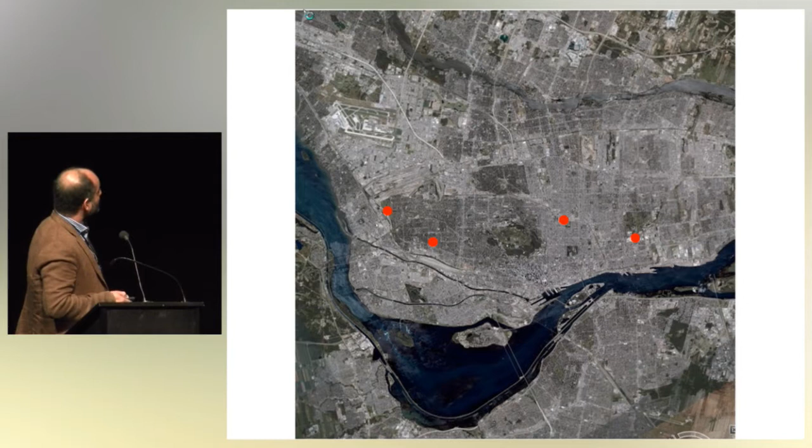Now, I'm not going to talk that much about what we actually won the award for. I'm going to talk about the part that we didn't win any awards for, or shouldn't have. Benny Farm is just to the west of the mountain, in Notre-Dame-de-Grâce, NDG. To orient those of you who haven't seen anything about this, it's World War II veterans housing that by the early 90s had fallen apart and was kind of empty for obvious reasons.

I flashed this slide because it took 11 years for the master planning of this thing to shake itself out. We were involved, but from the community side. By 2003, the plan was kind of fixed, and we were going to save some of those buildings—that was really what most of our concentration was on.

We embarked on our integrated design process for all the remaining buildings and for the Énergie Verte Benny Farm, the Green Energy Benny Farm project. We were imagining a kind of landscape—these are drawings from the early 90s, the early days of thinking about this.

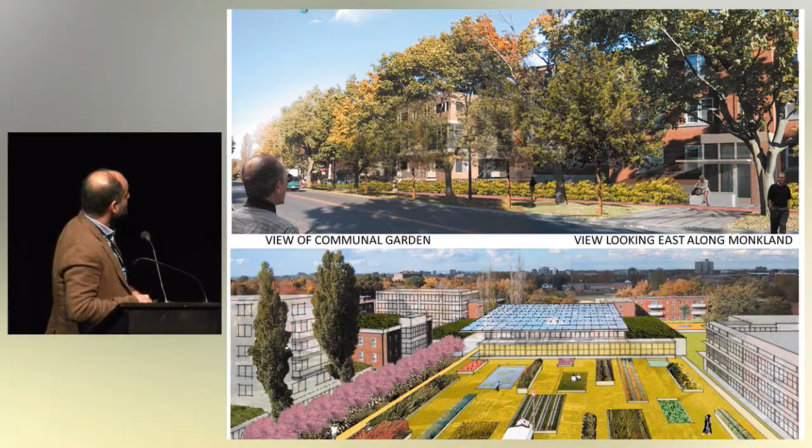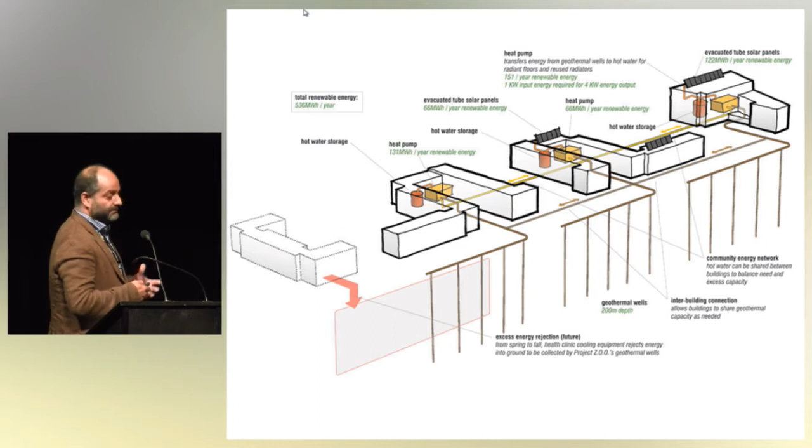The project that we actually won stuff for, and that was really fun to work on and execute, was a very complex but in some way really simple weaving of materials and energy and water infrastructures, et cetera, on the site.

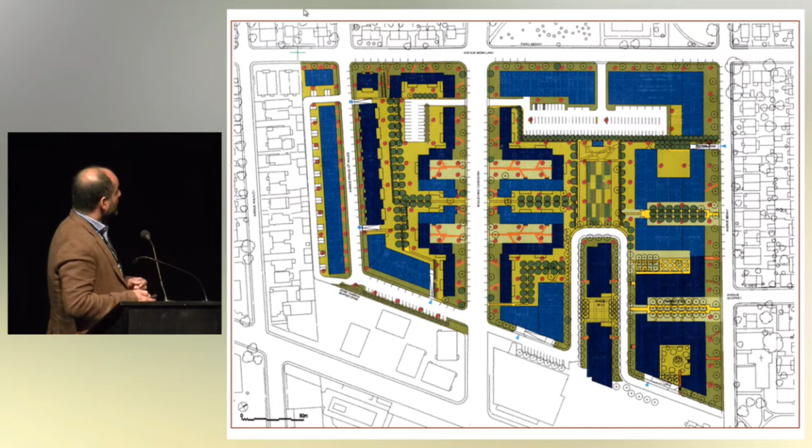Now, all I wanted to tell you about this project is that the site plan, even though we fought for the site plan and the maintaining of these buildings for 11 years, was actually made by Canada Lands Company and their consultants. There was something about it that I want to underline, and then I'm going to leave this project.

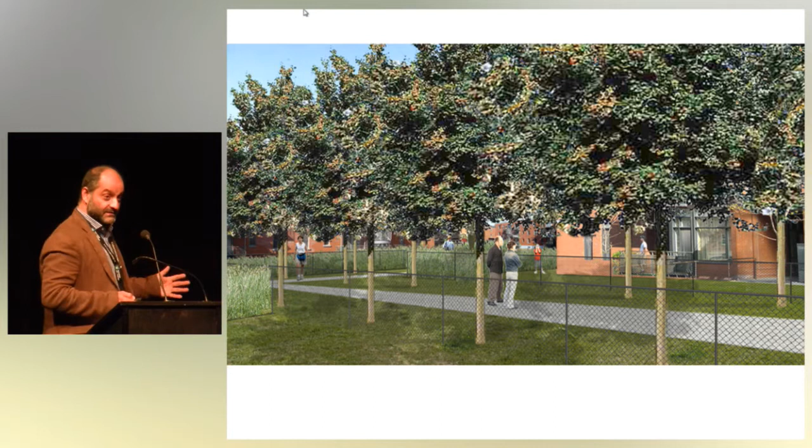This was their image—this was the vision they had for the site. Frost fences and all, mandated in the master plan, with really fixed property lines, and the agreements were all weird. In other words, there wasn't a lot of buy-in for this idea of the commons, except for one thing.

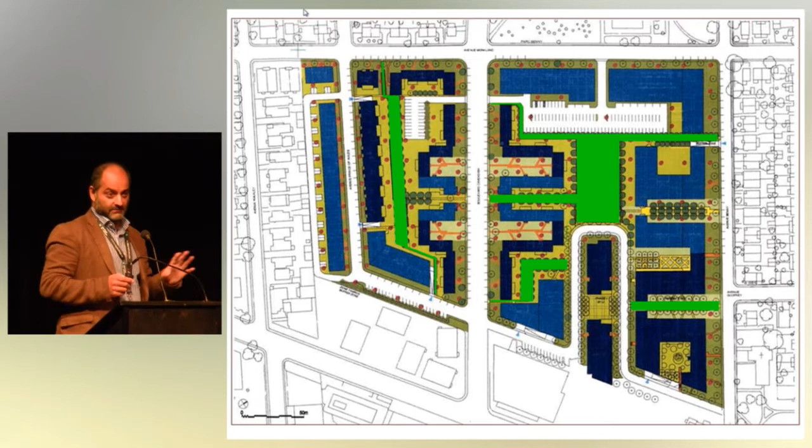So you see in green here—this is a really interesting thing they did, and it has an impact on the rest of my talk—they established this thing called the horizontal condominium, which was actually 10% of the site. Look at the form of it; it's kind of interesting, you can do some things with that.

On Benny Farm, with this 10%, what they decided to do was gardens. Kind of makes sense. So they did something, but it was really difficult because we couldn't do this—and we couldn't, because of the configuration of the horizontal condominium.

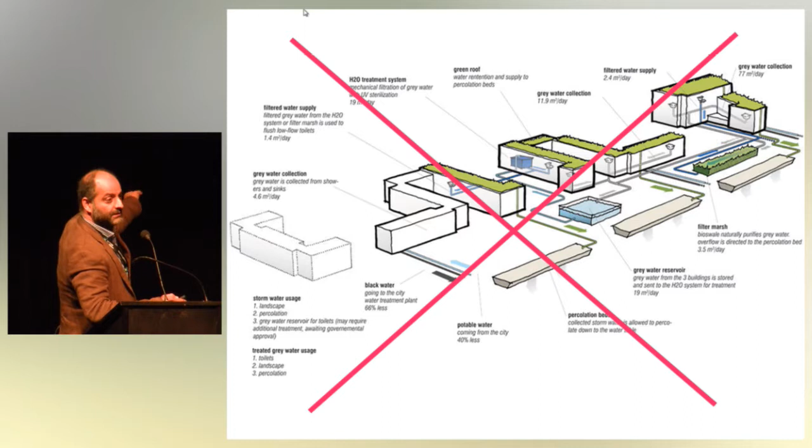More specifically, the problem is that without cooperation from the master plan—specifically where the property lines fall, and I'll add to that the agreements around them—shared living systems water management is very difficult to achieve, we found out. So I'm going to leave that now, and we're going to talk about Rosemont, which is another project.

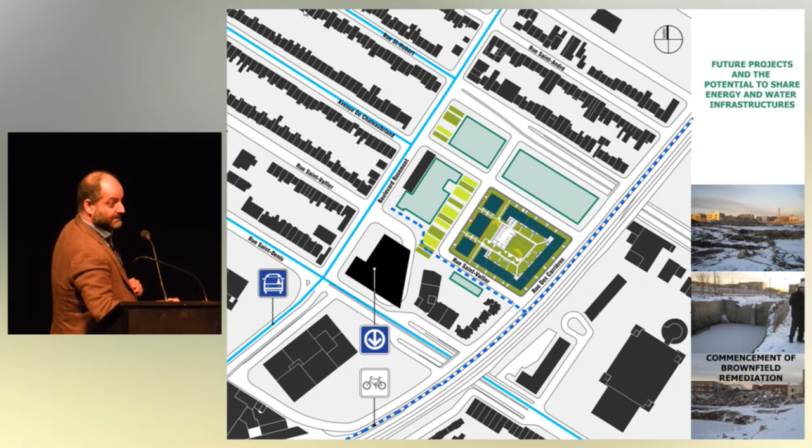It's on the other side of the mountain, in a kind of interesting neighborhood right near a metro. We actually had more control over the site plan this time. It was a smaller project too, but I wanted to show this one quickly because we got to do what we do at LIF, and we tried to integrate things as well as we could.

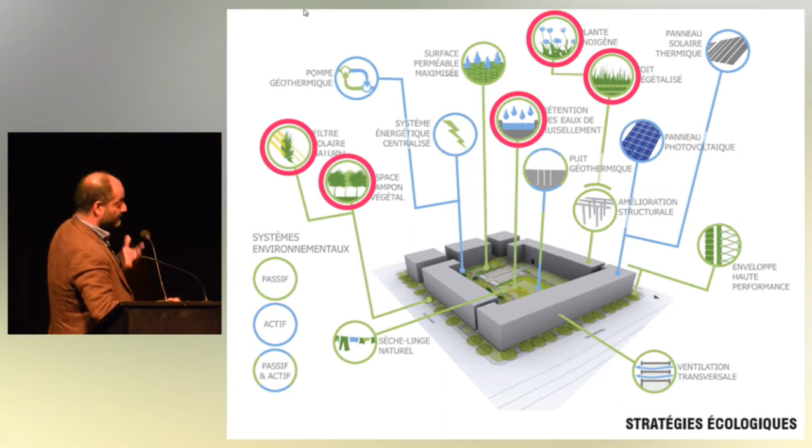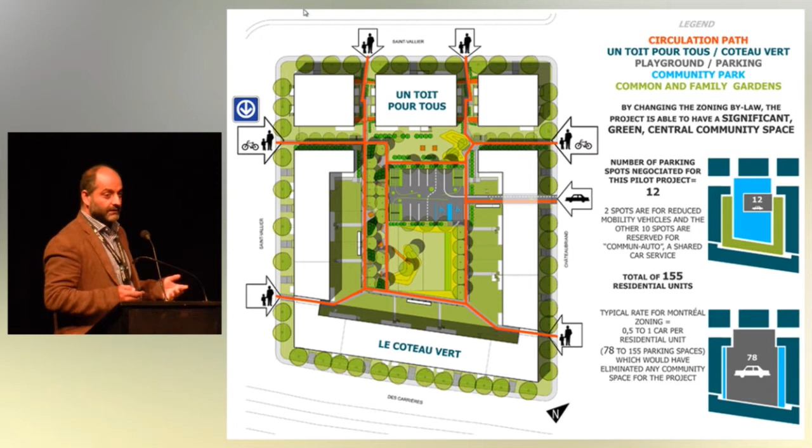In the site plan here, there are 2 different property owners, and we actually managed to get the city to release this crazy parking number they needed, which was 78—we got it down to 12. What we did with that extra space was make this kind of commons that also gathered rainwater, which doesn't come so much, but I'm told, we're all told this morning, that we're going to have plenty of water.

This basin here is meant to catch those extreme events, and there are also percolation beds to put it back into the water table, et cetera.

But what I want you to see here is a very simple lesson we learned: that lots of these infrastructures have multiple uses. It's, of course, where all the kids play, and it became very important for the placemaking side of the project.

It's a very successful project in many ways, but the coolest thing about this project is that people say, God, I love that courtyard. I'm really glad we were part of making that courtyard, and it's infrastructure, right?

So for those two projects, I want to leave this: define your common spaces and master plans with food and water in mind. You must, because they take up room, but they can have more than one purpose. So we learned those lessons.

You've got to think about property lines, you've got to think about servitudes, you've got to think about the agreements undertaken during the master planning side. And when you talk about biodiversity, you have to start also thinking about connectivity.

So here we're going to talk about this project, the Petite Rivière. We actually started in 2007, but these dates are when we were in the thick of it. So that's the kind of image of these dates.

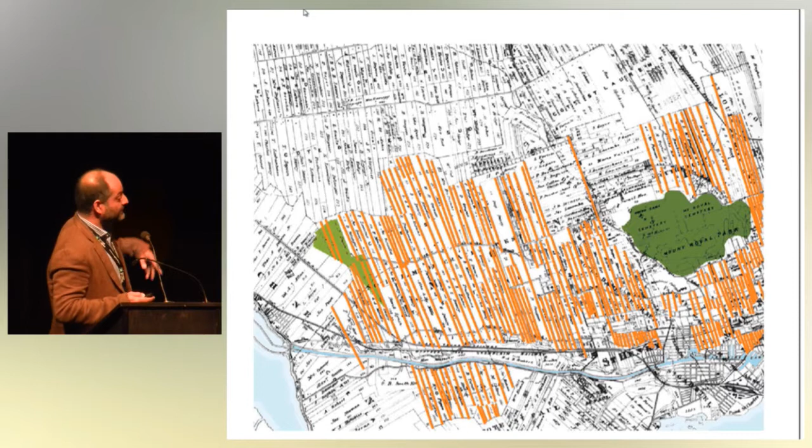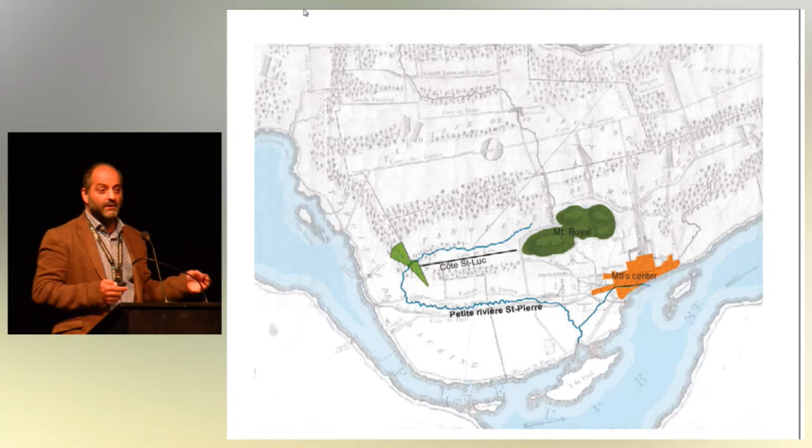Thinking about water, it was pretty interesting. I don't know if you know this, but the founding river of Montreal—there are two. Of course there's the St. Lawrence, but the other one is the Little St. Pierre River, and it's actually where that river comes out into the St. Lawrence, which is where the very first settlements in Montreal were built.

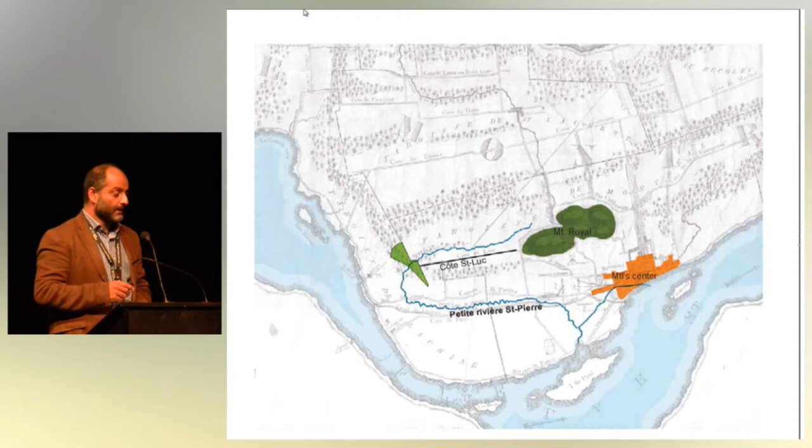Amerindian settlements as well, by the way. So there's the golf course, and you can see the Little St. Pierre River here, and you can very easily see the tree lines that run through the project. Now, I'm not going to spend a lot of time on the form of this thing—I want to get to biology, to the sort of natural condition of the site, to biodiversity.

And of course most of you know this is what a golf course is, right? It's a kind of grass and trees park with areas of what we call friche, kind of shrubberies. The interesting thing about this one is it's not a very high level golf course—I don't play golf really—and people lose their balls a lot, so they mow everywhere.

This is actually what the Petite Saint-Pierre River looks like today—it's the last daylit part of the founding river of Montreal. On the island, everything else is underground now. It's about 170 meters on this site, and it's kind of an open sewer, because this municipality and municipalities upstream have illegal sewer connections. We know because we saw poo in the river. So it's very polluted. All to say, it's a golf course in need of some serious remediation.

So let's go back here to point out: we decided in our planning process that we were going to take seriously food and water, which I won't talk so much about—my other panelist guests and colleagues are going to cover that. We decided here we were going to start taking on biodiversity in a more serious way, and we stacked our integrated design process with lots of people who know an awful lot about that, certainly more than me. I learned from them—biologists, landscape architects, ecologists, and naturalists. It was a very interesting and very good time.

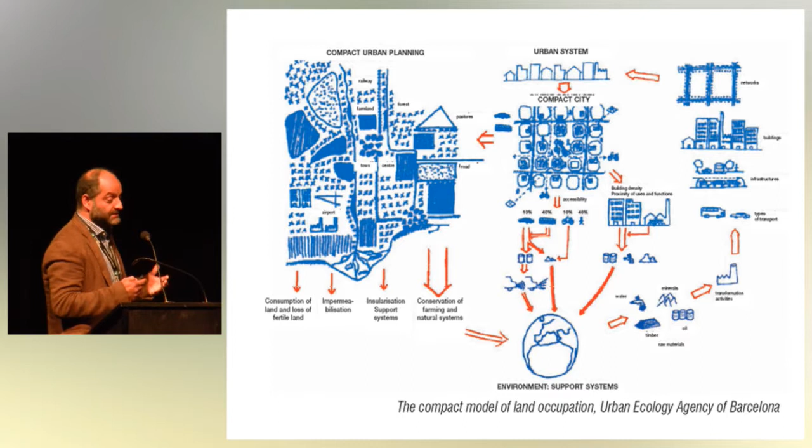We were working with the Urban Ecology Agency of Barcelona, and we were very seriously considering how to make more compact communities that actually had natural systems woven through them.

So you do what you do, right? You lay out and establish the radius around the center, and start doing your analysis and formal studies, and figure out where the water could be. And you do other things too.

Referencing regional ecological analogs. This was an idea that seems so obvious when someone says it, but I hadn't really thought about it yet. What does that mean? It means paying special attention to what would have been here if you weren't, right? So we were in the mixed wood plains ecosystem, the hickory sugar maple forest.

We had situations on the site which were very much like wildflower meadows, or would be, and very much like stream wetlands. So you see, if you do this, the natural systems and biodiversity on the site become much denser. Habitat complexity goes up. The amount of living biomass on the project site and natural systems resilience goes up, if the species you use in your modeling are actually all indigenous, not just from this general area, but from this particular region.

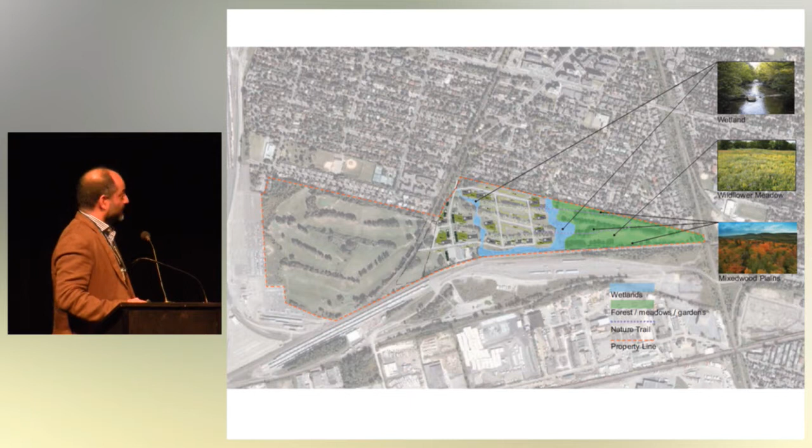So then we started trying to figure out, this is just the phase 1 part. It's not like we're leaving the other side alone, but there's a lot of that in this presentation because we zoom in and out, and conversations with the authorities having jurisdiction always made us focus on different areas. So we started laying out where these different things could be.

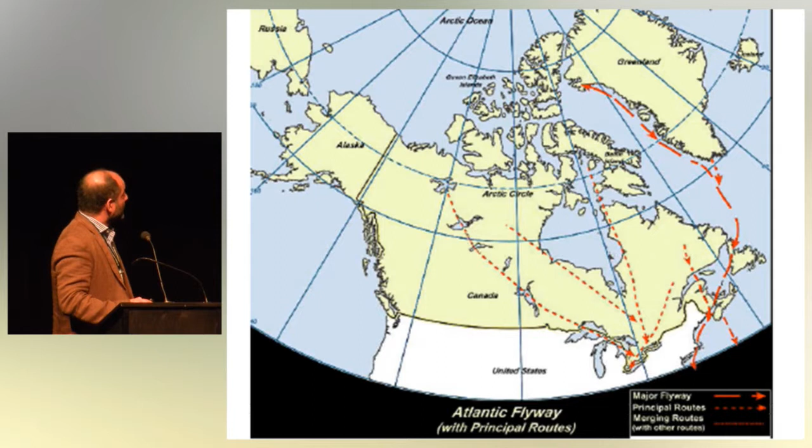But the thing about connectivity, which is the point I wanted to get back to, is that you have to think big, because everything in the natural world really wants to be connected to everything else. So we even looked, very sensitively, at the Atlantic flyways, and of course some pass right over our site.

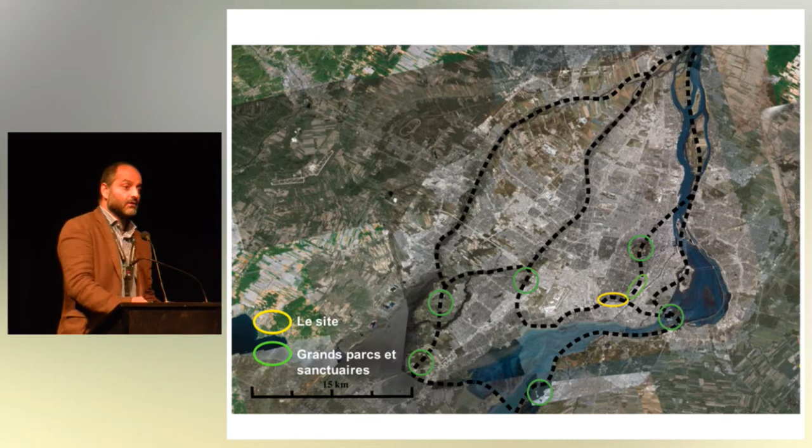We started looking also at the other sanctuaries and large green spaces around us, and at local green areas and what linkages need to be supported and improved. We looked immediately right around the site at what we're actually connected to and what we could be connected to with very little effort.

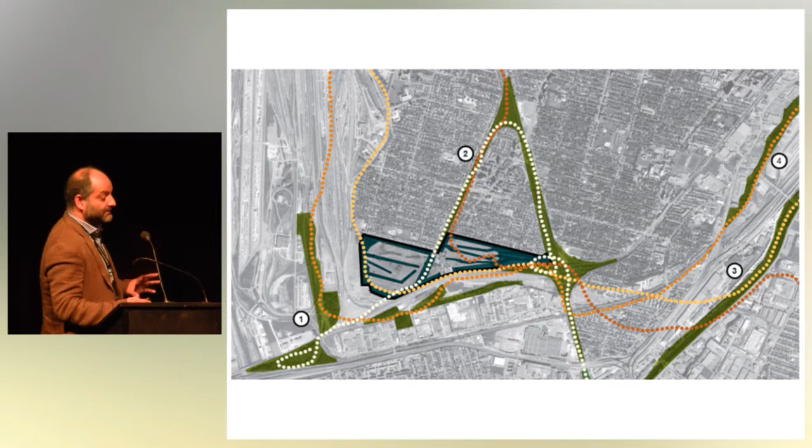I can't go too far into any of this, but connectivity becomes very important, but maybe not as important as the actual species and how they need to live. Connectivity, you have to have.

But when you do your species inventories, which by the way you need to do if you're going to take this seriously, because you need to know what's living there now, you never know what you'll learn. We found 132 species of indigenous plants and trees, 35 species of birds, mammals, a couple of reptiles, and an amphibian. That should tell you something right away, one amphibian.

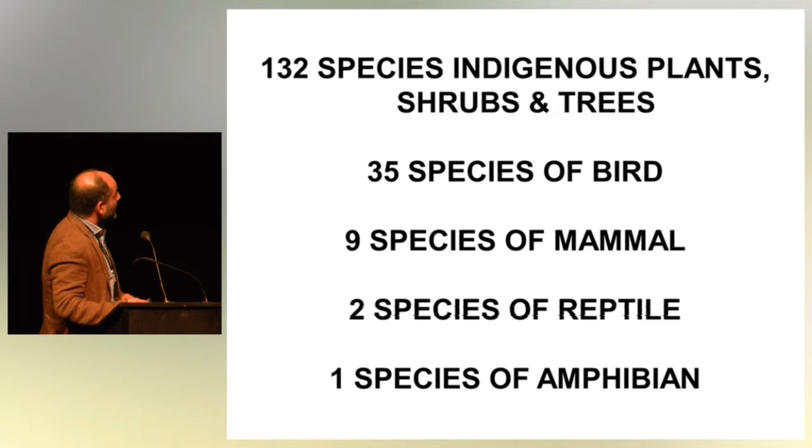We couldn't see them, by the way. You walk the golf course and you think, what, there's nothing here. Where are these creatures?

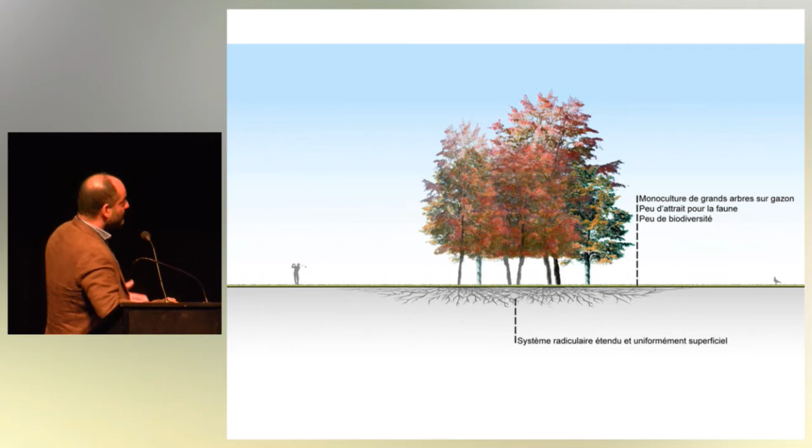So we decided that wherever we found these sort of things, we were going to increase the width of the plantings, add supplementary plantings, and increase the biodiversity of the understory to drive this cycle of nutrients. The funny thing is that plants and animals need communities of others—they have to have them or they don't grow well and they're not happy. They need these ecosystems. Even more than space, plants and animals need company, and they're not so different from us, really.

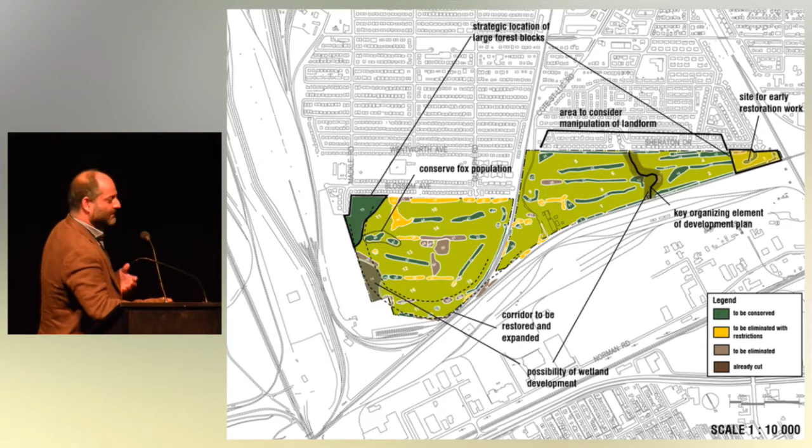So we started putting together, okay, what can we take out? Do we need to take anything out? How can we change, how can we save? And we started establishing protected areas—high biodiversity, medium, low biodiversity areas—planning that way, taking it seriously. It was pushing the buildings around, it really was.

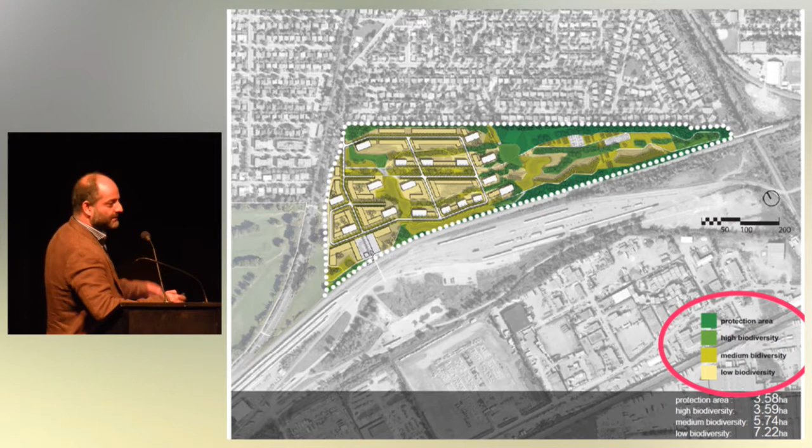And meanwhile, we're laying out the water infrastructure, and we're thinking, by the way, none of this water exists on the site, but we know now that it all will. So we figured out where the water would go 100 years from now, 50 years from now, maybe even like tomorrow by the sounds of it.

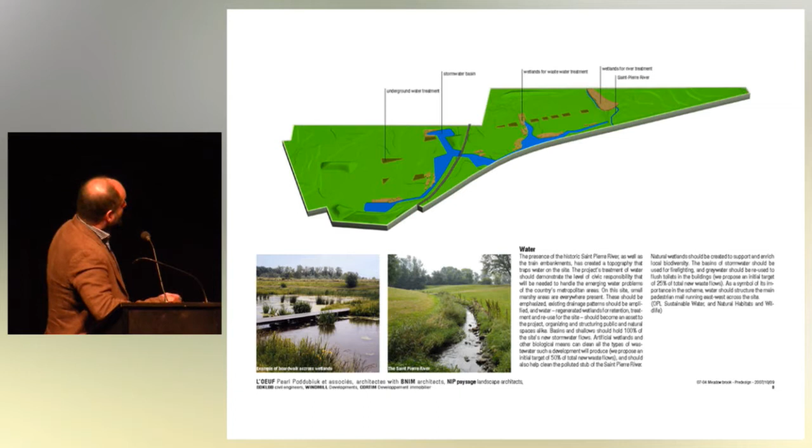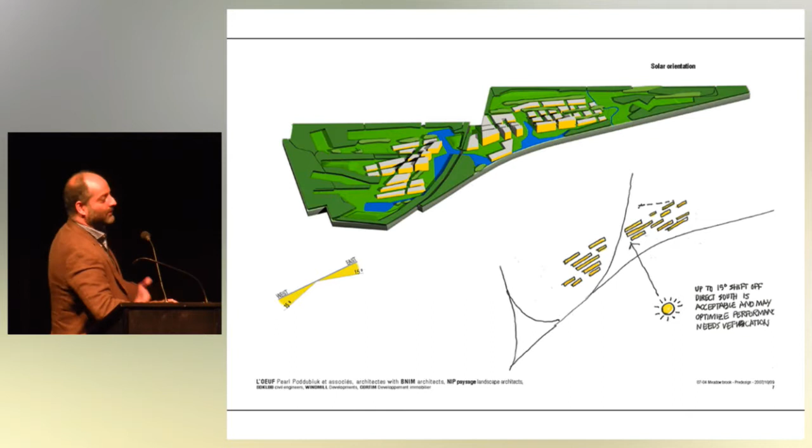We started laying the buildings out around all of these systems. And get that—laying the buildings out around all of this is very, very important, because the master plan can often be a problem.

So I want to come back here just to point out, here we were going to revitalize the Petit Saint-Pierre River—I can't get into the details, I'm sorry. But we're also going to have a more engineered wetland side that would more consciously treat the water coming from the development. This was just fixing what was already a problem; this is fixing what we make.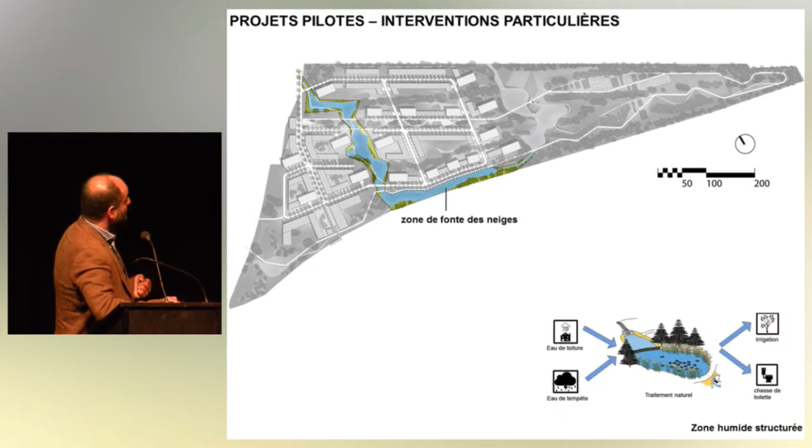Here, this was just an image to show some of what we had, so I'll flash through. This was a community corridor that runs through the center, which was going to become important for the gardening and urban agricultural side. I wanted to point out, it's kind of hard to see, but maybe it's actually easier to see.

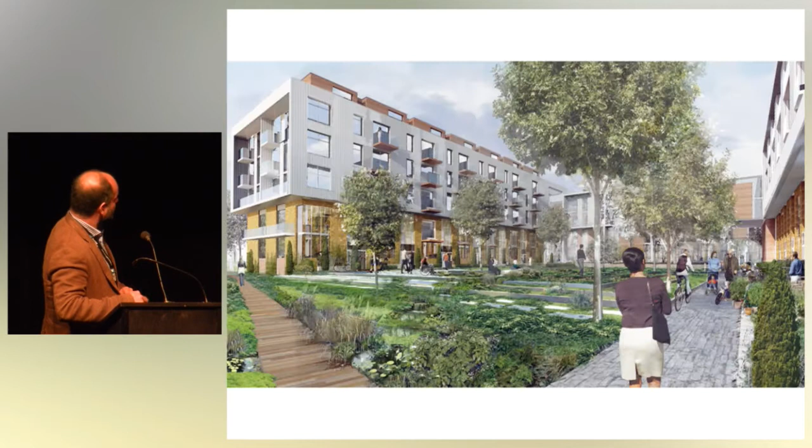Notice the kind of fuzziness of everything. It was actually something we were really aiming for in the renderings, to get this idea that this ground is creeping. Oops, always pushing the wrong buttons. In all of these images there's no kind of fixed and hard edges. This has to do with connectivity. It can show up in your imagery, and it should. It kind of inspires what you do.

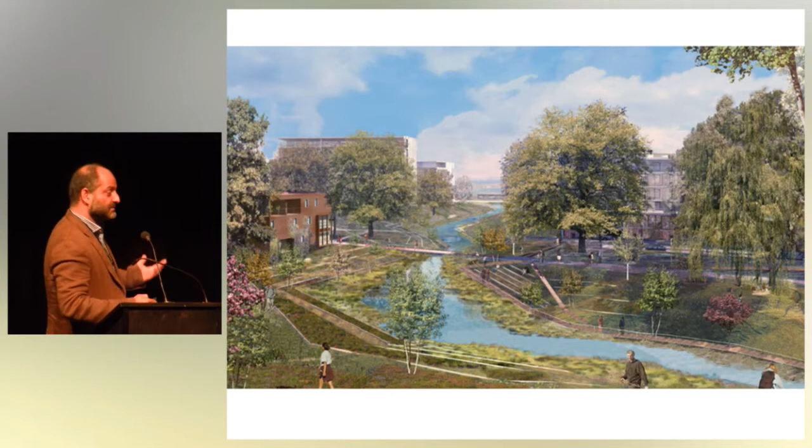So we started working through this, and those were images that we were producing for the city. They're not final design, but this was phase one. So in phase one, I wanted to point out something.

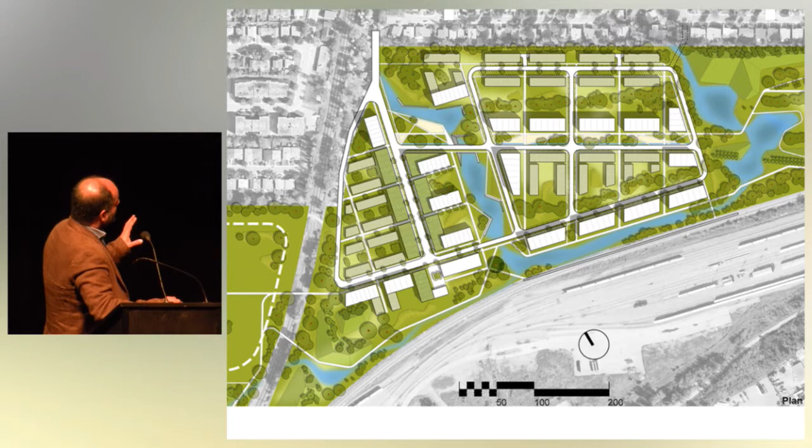All of us were calling ourselves the natural systems team, and I was leading that group. We were coming up with different strategies for encouraging biodiversity on the site, and we started this idea of corridors. Corridors became very important - aerial corridors, ground plane corridors - literally so that creatures can move from A to B through your development. When you superimpose those with the vertically connected understory, you actually get living, not just trees, but actual living nutrient cycling corridors of life.

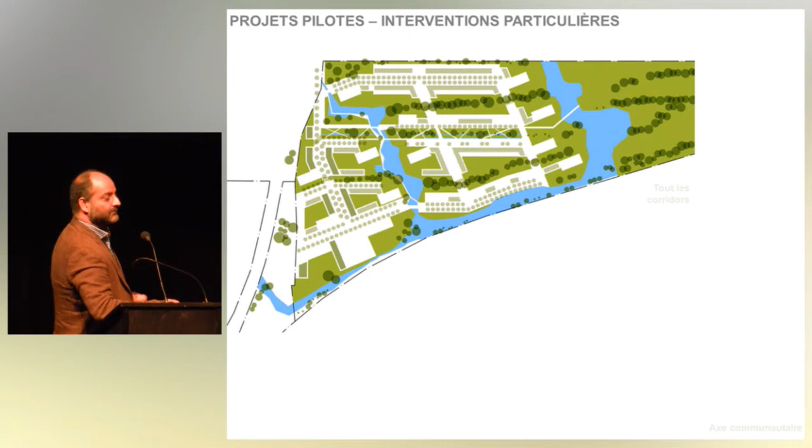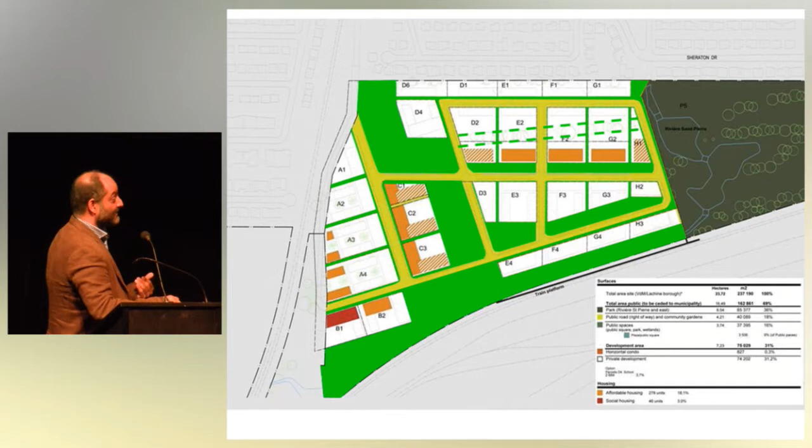And this is where I wanted to get. The bright green of phase one - well even better, look at the lots. The lots are all floating in islands of green. The idea is that your property lines should very rarely butt up against each other, that the private properties need public properties in between them. The city, I was amazed, was on board with this. They were saying, yeah, okay, let's go.

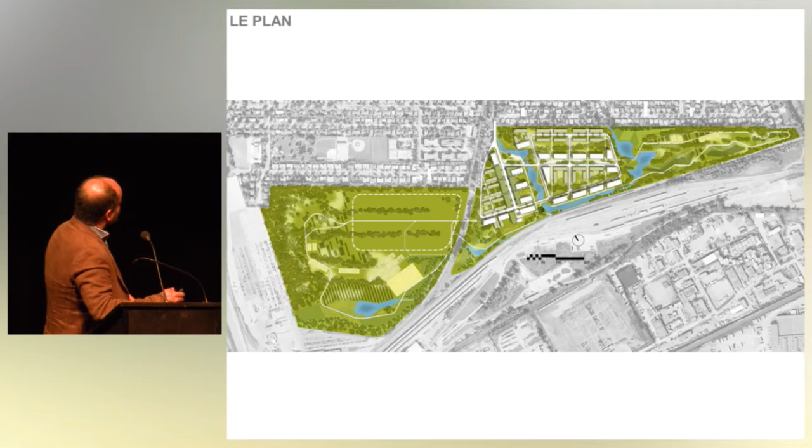And that, in our case, was representing 40% of the site. What could we do with 40% of the site? So we had natural corridors and living systems, and we had water treatment, and agriculture, which I haven't talked about. And then there was the plan, including phase one, and phase two was going to happen on the west side.

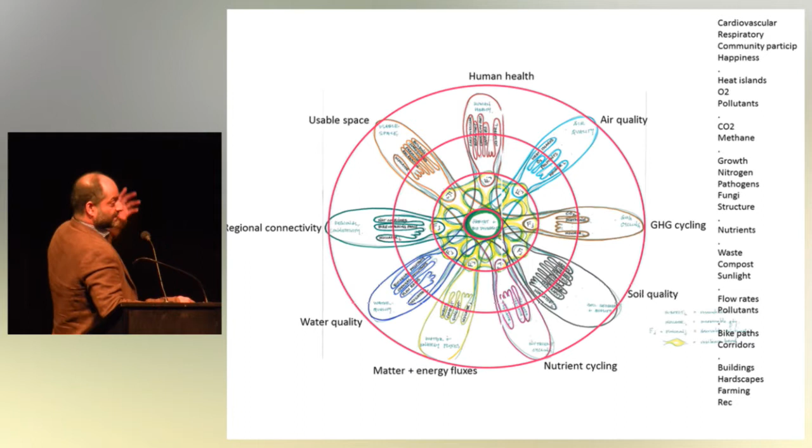So how can data about habitat and biodiversity be connected to data about ecosystem services - that was one of the driving questions we had. We decided, we had a whole research structure, really solid, the university was on board. In the center there's this idea about habitat and biodiversity, and the outer ring are the main subjects: human health, air quality, greenhouse gas cycling, nutrient cycling, water quality, all of it. The really interesting part was that we were positing that through certain indicators - things you could actually go out in the field and measure - we would be able to identify the functional relationships that connected habitat and biodiversity to all of these subjects.

We called this thing on the interior the resilience band - the idea that somehow these relationships were knitted together across subjects. We didn't know how, but we were sure it was the truth, and we just needed to expose all of that.

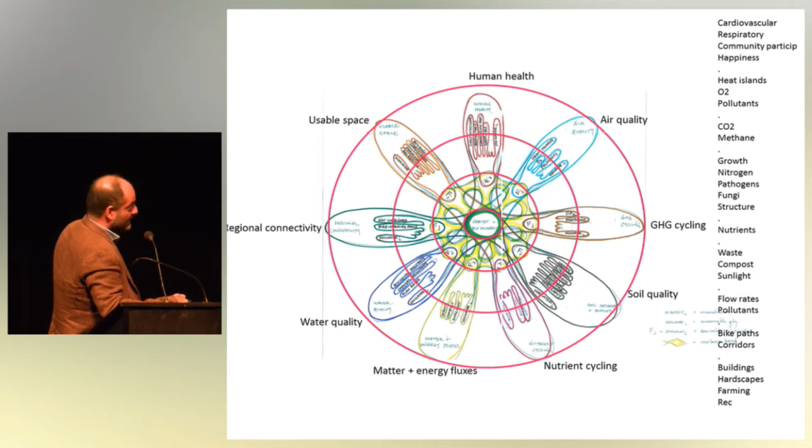And then the weird thing, of course, happened. This happened - what the F? The city pulled its support for the project, and our funding stopped. Now I'm not going to go there because that's very controversial, and anyway, the courts are involved.

But the point is, you know this, and you work for 20 years, and you still know this: if you don't keep your eye on this ball, without the cooperation from the authorities having jurisdiction, your project doesn't exist. That's exactly what happened to Petite Rivière, try as you might.

I'm going to talk now, just finish up with a project called the Biodome, and it's only a couple of minutes, but it's going to tell you, it sort of summarizes the learning, a place we ended up, right?

So the Biodome is actually much more of an architecture project per se. It's on the Olympic site in Montreal. So how many know about what the Biodome is? Have you been there? Okay, so you've seen it. It's quite a remarkable thing, eh?

It's like 5 little petri dishes in the velodrome. Amazing what they've done, right? So you got 5 ecosystems, again, don't kill me, Ian. 5 ecosystems in there at work, kind of living, not really on their own, as you'll see, but kind of living. You've got the Labrador coast, you've got the Gulf of St. Lawrence, you've got the Central American tropical forest, unbelievable. You've got the South Pole, essentially, and you've got our own hickory maple forest, the Laurentian forest.

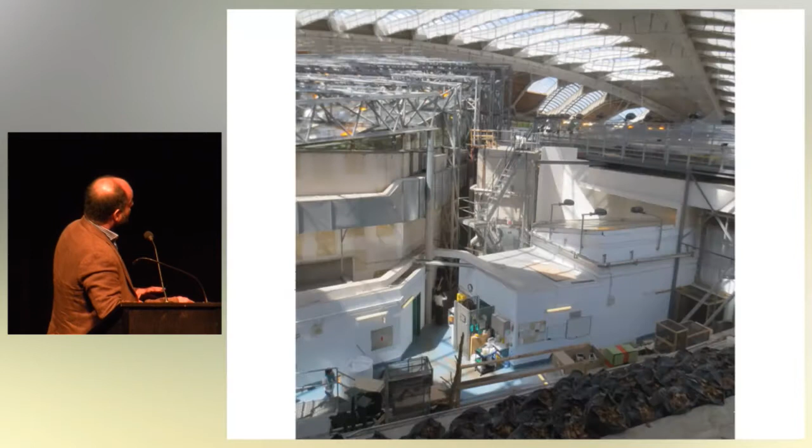When you step behind these little ecosystems, looking at what is required to keep them alive is really breathtaking. The infrastructure we need to build to have anything close to—okay, yeah, you could understand it for the tropical rainforest or for the Arctic, but for our own Laurentian forest, why is it that we actually have to support our own Laurentian forest with this kind of infrastructure when we put it inside a building? It's really an eye-opener, right?

So we thought, really, is that what you have to do? Now, they built this in 1993. So maybe they could do it with cooler and smaller systems now, but the point is the point.

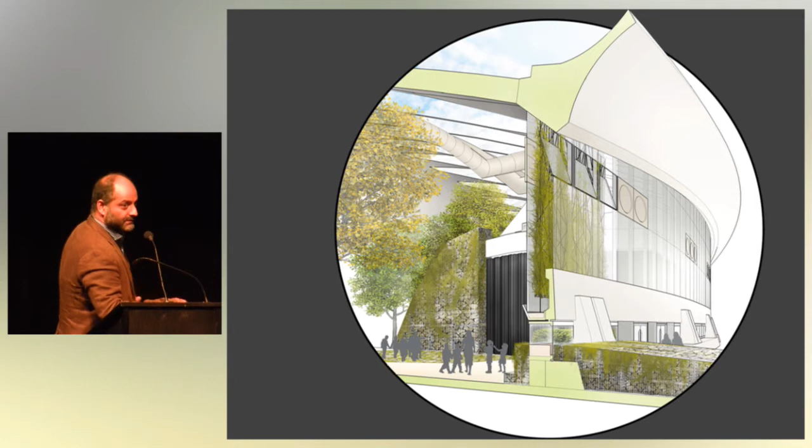So we started our project, and I'm just going to flash through some of these slides, because our project became trying to imagine how architecture and, in this case mostly plants, could live together, how we already see them living together, what that might mean actually for the building, how the building could be—it's a competition project, right? So can the building be infested? To use another kind of pejorative term, can the building kind of be infested by the Laurentian forest, the hickory maple forest?

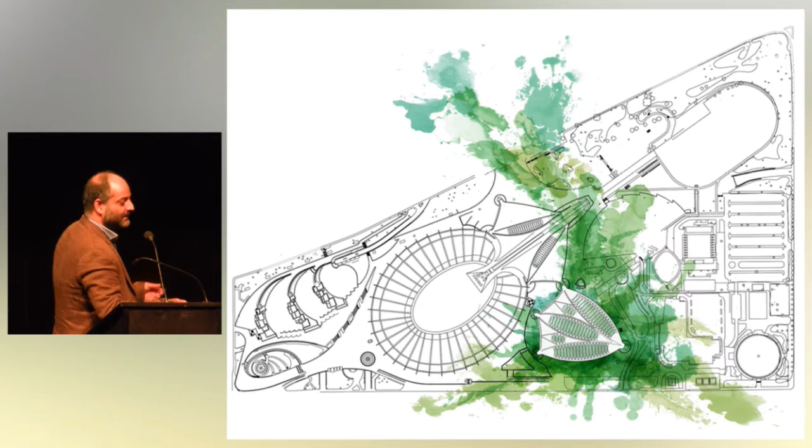And could we then start to imagine how it would influence our understanding of the city, that it would leave the building and kind of spread out? So the thing is that we imagine this project as something that reinvents the building as a space shared between human, animal, and plant communities, right? A kind of society of hybrid life. And we can't be spectators anymore.

So what's the kind of save-the-planet message, right? World populations—if they really did, we heard this on the news a couple of days ago, right? I nearly stopped the car. World populations of fish, birds, mammals, amphibians, and reptiles really fell overall by 52% in the last 40 years. Really? So I think in 2014, we have no other choice. We have to see ourselves as citizens of nature. That's it.

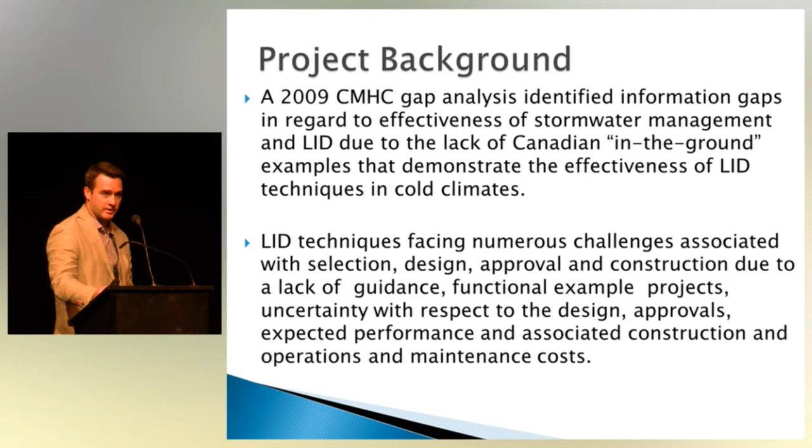So this study aimed to fulfill some of those uncertainties. The project goal was to result in the research, monitoring, and documentation of the 6 sites across Canada. These are all pilot projects in generally residential and mixed-use land uses. The intent was to help build support by reducing the risk of the unknown.

There's a lot of hesitation in terms of implementing LID because there are a lot of unknown factors. How do these things present? How do we get them implemented? I'm going to give you an idea today of how these things are performing with real examples.

The objective was to examine the technical performance specifically of bioretention cells and bioswales. These are typical LID techniques, probably more popular than, say, permeable pavers, although they're everywhere, and perforated pipe systems. So we focused on these ones.

We looked at water quality, water quantity, and also assessed the vegetation health of these systems. We also looked at capital and operational costs, and the regulatory and approval considerations. I'm not going to get into those today, I'm just going to focus on the monitoring results, but I'll steer you toward where you can find that information. So, the monitoring program: we did coordinated site inspections.

Because bioswales and bioretention areas use some sort of biomedia, a sand mix or with organic compounds, to physically filtrate stormwater, we wanted to look at the media because it's responsible for a lot of the water quality benefits you're going to see from these systems. So we really wanted to evaluate what the media consists of.

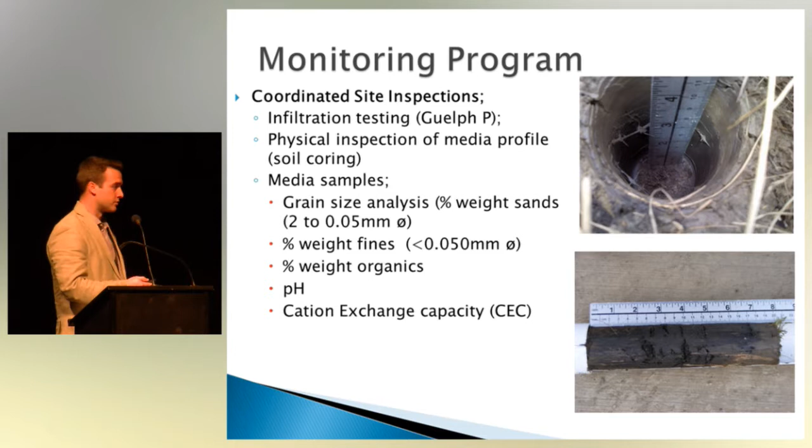Well, do we have an enter button or something like that? She's gone. Yeah.

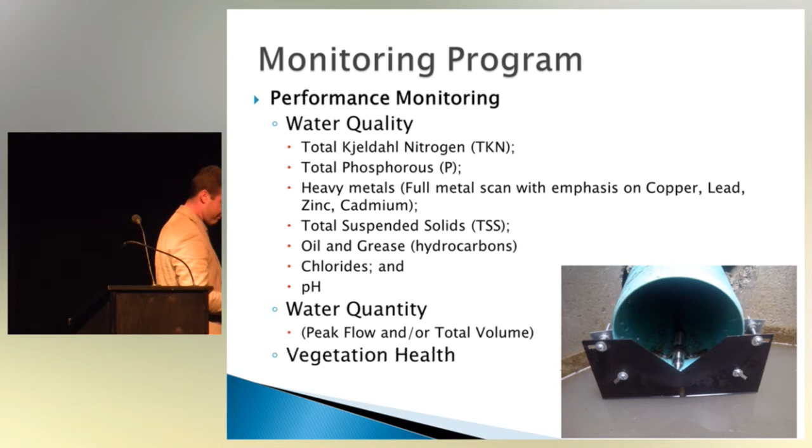Fixed itself. Look at that. All right, I'm good.

So the media testing. This just gives you the summary of results between each site, and all I want to demonstrate here is it varied. Some of these systems were predominantly sand biomedia, and a lot were clay, with varying infiltration rates, from 21 mils to 263. So it varied. There's no real set design criteria on how you put these together, as long as they work.

So Trent Street in Victoria, BC, this is in a residential/institutional area. It's a bump-out rain garden, so basically the new curb actually protrudes into the road surface. The existing curb line would have been somewhere in here, so they've stuck it out into the road. There's one on either side of the street, small drainage area. We could do water quality monitoring here, but we couldn't do quantity.

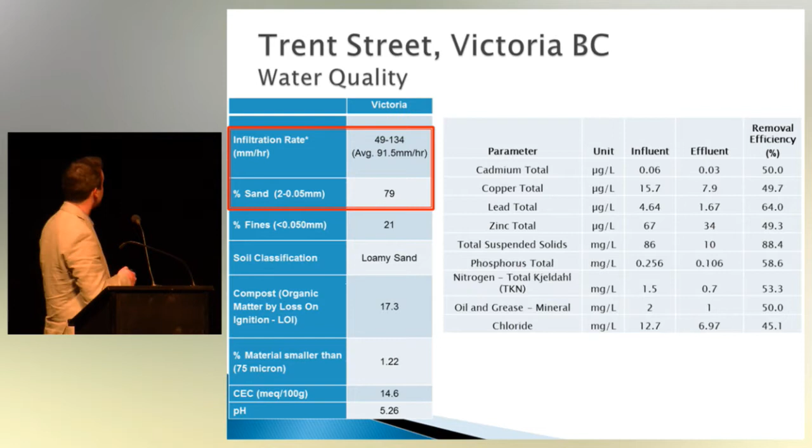So looking at the removal rates, I'm summarizing the results. We had a biomedia predominantly sand with an infiltration rate of around 100 millimeters, 91.5. That's very fast, that'll move a lot of water when you're infiltrating. Looking at the contaminants, we're seeing 88.4% reduction in TSS. MOE guidelines for an enhanced facility is 80, so this is performing very well in terms of TSS removal.

CEC values, we typically like to see a value of 10. In this case we're at 14. We're seeing removal efficiencies of the heavy metals anywhere from 50 to 65%. It's a moderate range.

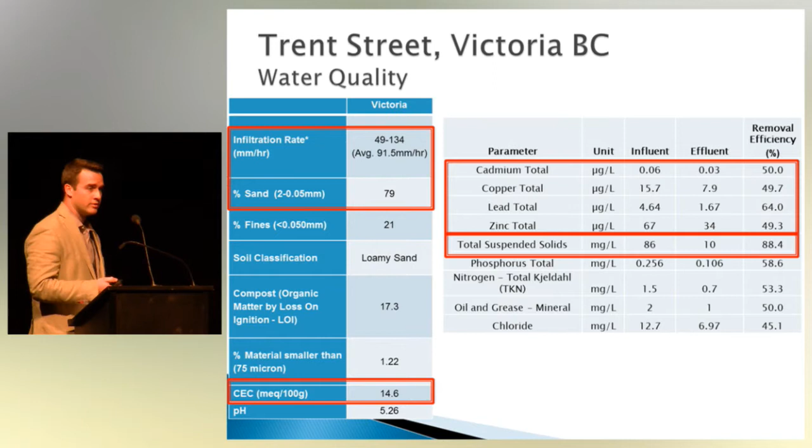Trumpeter Street in Edmonton, Alberta, this is in a residential subdivision. It's center median bioswales. We did water quality and quantity monitoring at this site. Here's the center median bioswales you see in this area. Compared to Trent Street, the infiltration rate is much lower, almost just over 20, with a clay content of 77. So this facility doesn't really infiltrate a lot of water.

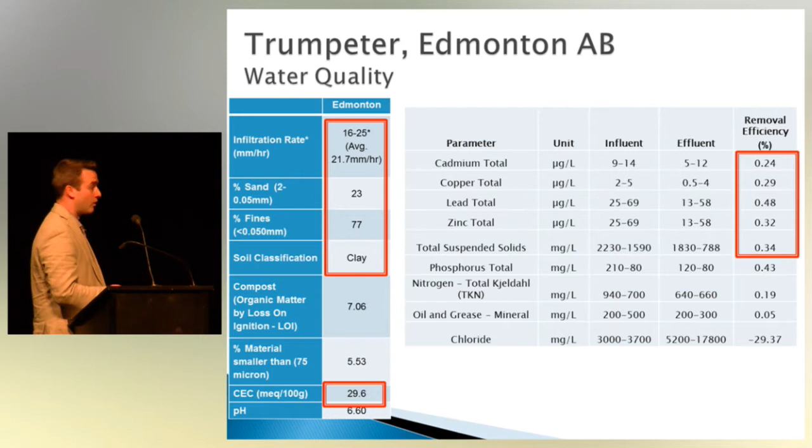And you can see that in the removal efficiencies - heavy metal reductions anywhere from 20 to 30%. So a lot of the flow we're getting is not necessarily infiltrating, we're collecting it over the ground surface. This facility is actually more functioning as an enhanced swale. We are seeing some infiltration. With a cation exchange capacity of around 30, you would expect a lot of heavy metal uptake, but in this case you're not seeing it because we're not actually getting the water into the ground. It's flowing over the surface, and we're collecting it. That's why the effluent and influent are so similar.

In terms of quantity reductions, we broke it up into various events from the precipitation data we had. Outflow volume we were able to get, but we had to model the inflow because in a lot of these facilities the inflow comes in sheet flow from the road surface - you're not going to be able to monitor that. So we took the drainage area and precipitation events and did a model to get an estimated value. Even with that estimate, compared to what we saw, you're seeing anywhere from 67 to 88% reductions in a facility that doesn't really infiltrate a lot of water. So that's pretty significant.

Winston Heights, this one's in Alberta. It's in a residential area, again in the municipal right-of-way. We did water quality and quantity monitoring on this facility. This is kind of in the mid-range between the Edmonton site and the Victoria site. Infiltration rates are high, higher than what we would expect - you can see the range, 4 to 144. That's a pretty big spread.

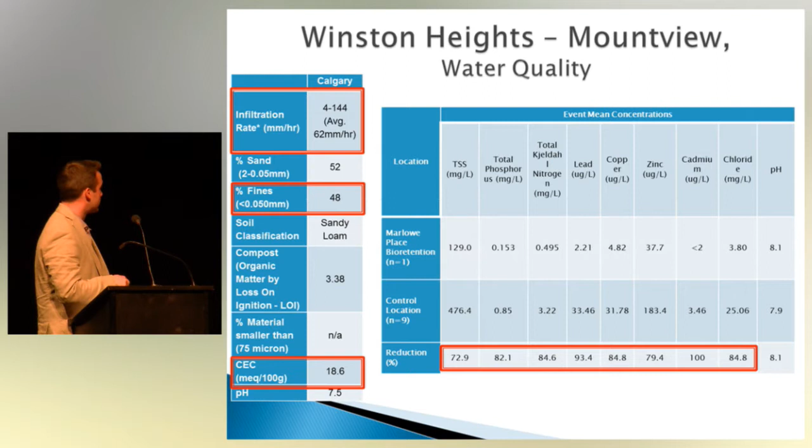At 48% fines, typically we see failures of infiltration around 25 to 30%, so this is actually really high. 18% for CEC, a value of 18. But you can see the removal efficiencies - again for TSS we're pushing to 80, we're in the low 70s. But look at the metals - metals almost 85 to 100% reductions.

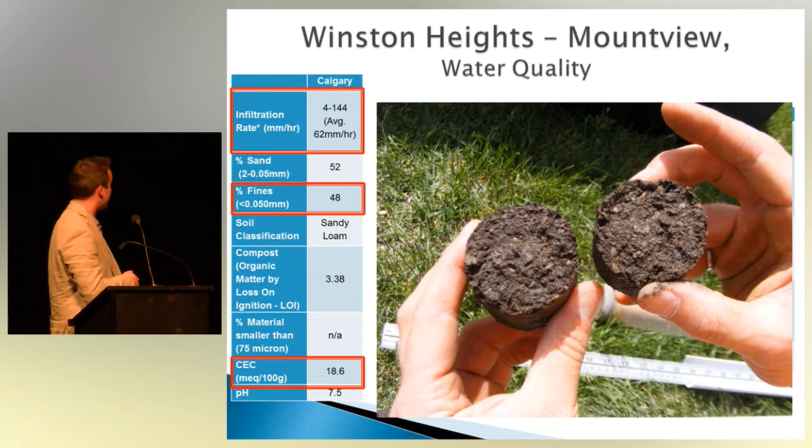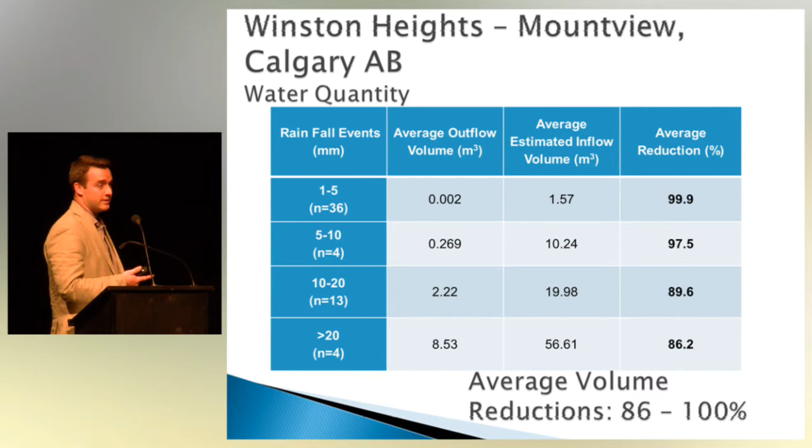The only thing we could think of attributing to the higher infiltration rates is the gravel content - the distribution of material in the sample had a lot of fines, but also a lot of coarse gravels, coarse sands, and fine gravels. Perhaps that's helping with the connective porosity, allowing some of that contaminant-laden water to get through the media. The quantity results we found: volume reductions from 86 to 100%. The water quality results I'm presenting are from the flow events we were actually able to sample. This facility is infiltrating and basically retaining 86 to 100% of those rainfall events.

Kitchener, urban roads, so this is in an urban environment. We couldn't do water quality on this site, just the way it was constructed, but we did do water quantity. In this particular site, because we're in the downtown core, there's a lot of salting, so they put in little gates for the wintertime to close them so they're not infiltrating chlorides into their wellhead protection areas, which is a smart thing to do.

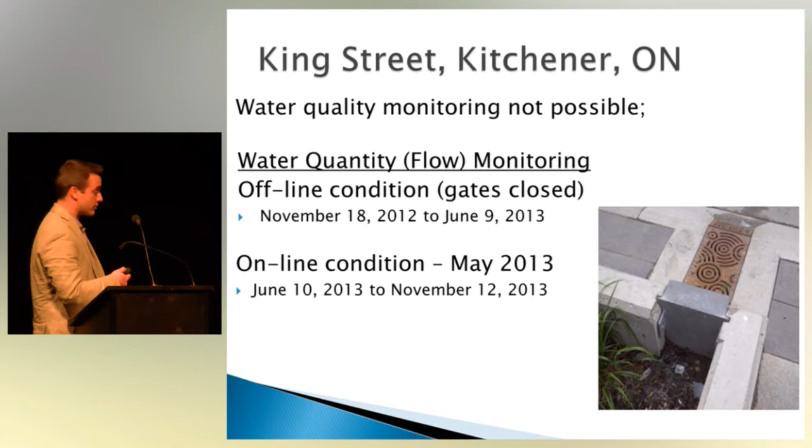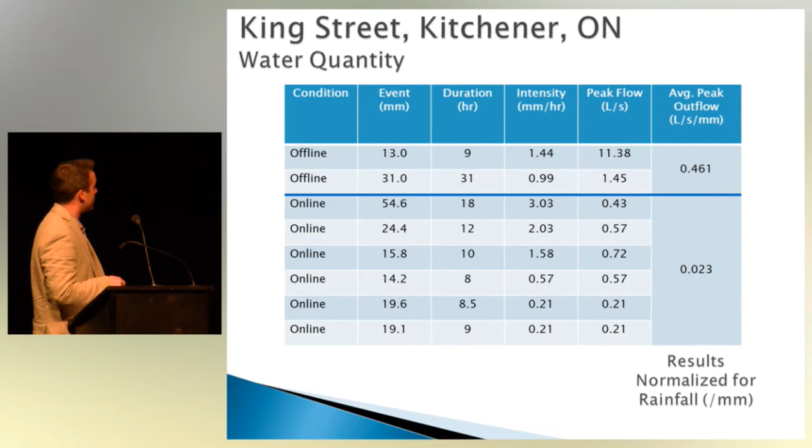So we evaluated basically when it was offline and when it was online. All I'm showing here is the peak flows. We evaluated this site on peak flows, and we just normalized it for the size of events that we had. You can see there's a magnitude difference between offline and online, a huge reduction in the amount of peak flows we're seeing from these systems.

This is the Jeanne-Mance community in Montreal, Quebec. It's a series of 3 bioswales that drains basically a townhouse complex parking lot. Again, we didn't do water quality here, and I'll explain why in a second, but we did do flow monitoring, from July to February 2013. There were 204 events, the max being 38.9.

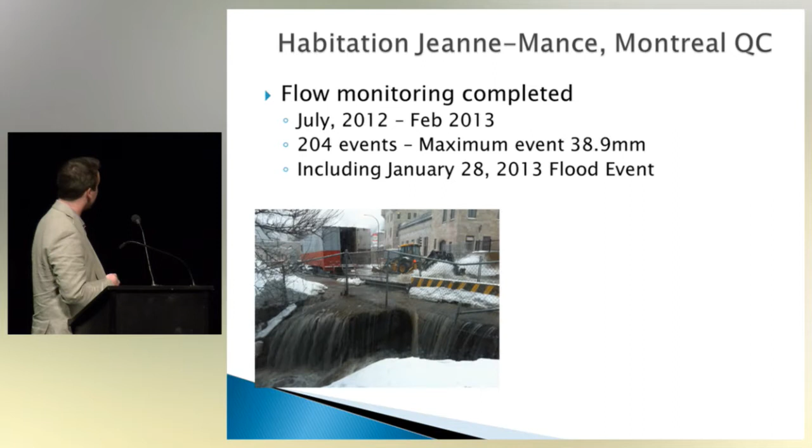Included in that, and as we've seen in the morning, is some of the flood events - there's a flood event in Montreal on January 28, 2013. We got that event in monitoring, and you can capture kind of what was happening at the time in Montreal during that event. Well, there's your flow - it's zero. Zero outflow from this facility. Hence why we didn't do water quality, because there's really no point. You wouldn't want to be out there in a storm that produced flow.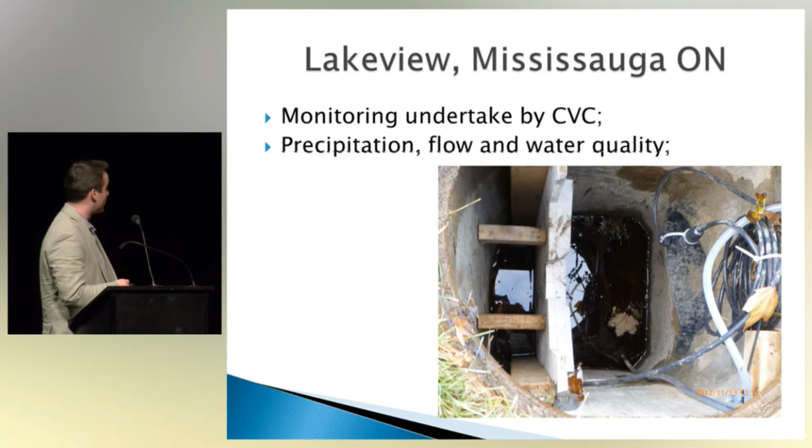It's monitored by the Credit Valley Conservation Authority, and the data I'm going to present to you today is their data. They did precipitation, flow, and water quality. And this is the water quantity response we got. This is basically events 20 to 78 millimeters, so anything under that, we didn't see any outflow from these facilities.

So up to and including the 20 mil, we're seeing zero outflow, so full retention. And that's 100% water quality as well. You can't have quality without quantity.

So these are some of the bigger events. April, 7-hour, 19 mil - a day later, you got 25 millimeters. June, we had 33 in 20 hours. July 8th, that's the big storm that we had, I think it was 2013 last year - 2 hours, 78 millimeter event. That's pushing a 1 in 100 year event, if I want to be conservative, 1 in 50. So it's a massive event.

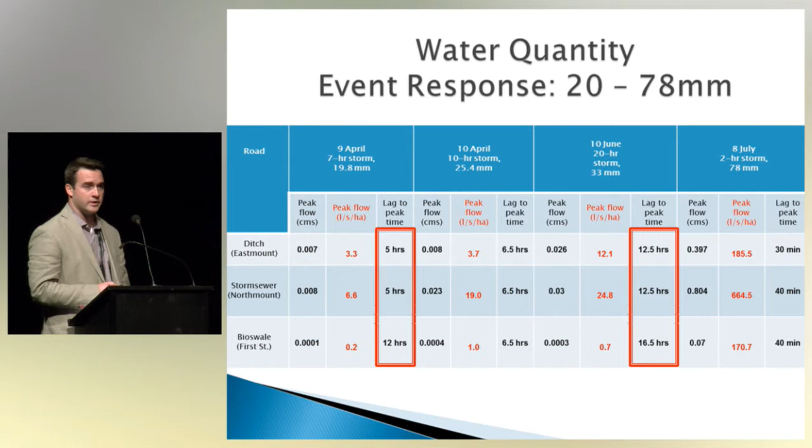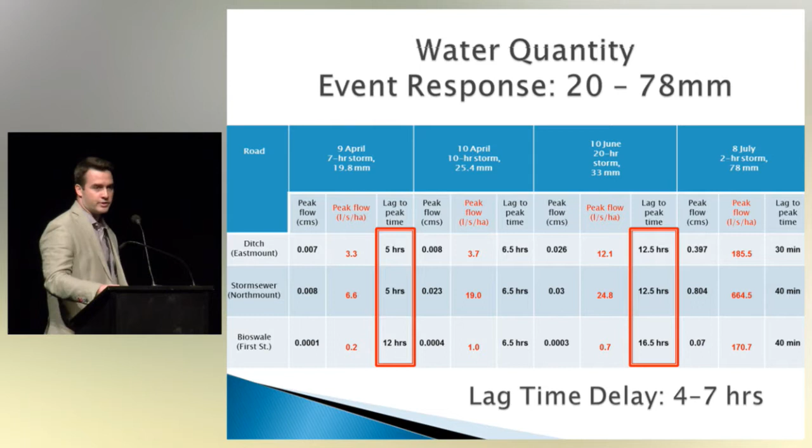Removal efficiencies for these events, I'm just going to key in on TSS. So you're at 78 to 96%. What's more impressive is that these are significant rainfall events, bigger than the 25 millimeter event. We're still providing water quality at an enhanced level according to MOE, 80% TSS removal. So for these major events, this system is still providing excellent water quality.

So performance summary, I'm just going to summarize the gist of it. For the true infiltration practices, Trumpeter is one of those. We didn't have a lot of infiltration, but for these ones, site designs were generally for the 25 millimeter event, an inch of rain. To put that in context, that's 90% of the annual rainfall you'll see in a year. It's typical storms of 25 millimeters or less.

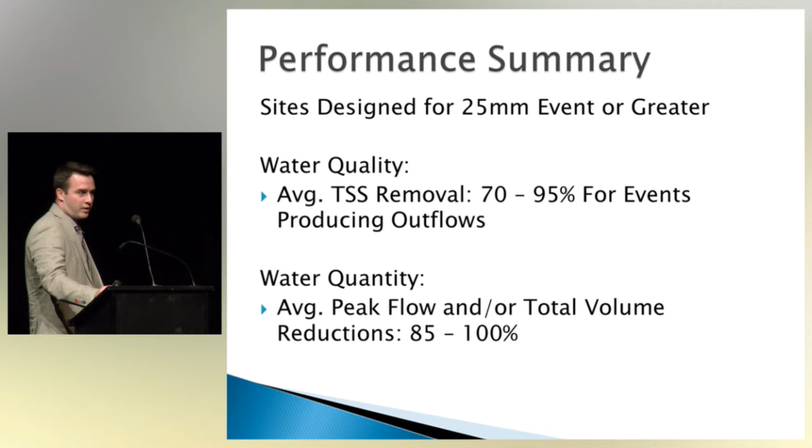In terms of water quality, for the events where we actually saw flow, we're seeing 70 to 95% reduction in TSS. In terms of water quantity, average peak flow or total volume reductions for those events is 85 to 100%. So it gives you context of how well these facilities are performing compared to their design criteria. In my opinion, they're doing much better than any regulatory approval design criteria that's out there.

So the whole point of the presentation was to provide you with some confidence moving forward in terms of how LID facilities function, how they work, and how they perform. When we get into planning, design, and all that, it's a whole other monster, but in the last year or two we've come out with some more available resources.

We've worked closely with the Credit Valley Conservation Authority. In this particular study, there will be 6 case studies coming out which detail a lot on the monitoring results that just came out, but it also goes through the capital costs and maintenance costs associated where we had data available, and the approval considerations undertaken as part of these studies. There's a TRCA and CVC design guide and planning guide out there.

And just this past year, we did a Gray to Green retrofit guide. These retrofit guides are basically a how-to manual that goes from planning to design to construction to operation and maintenance, cost-benefit analysis, right through, along with case studies that show how to implement LID within various land uses, whether it be the road right-of-way, public lands, residential, commercial and industrial. It pretty well goes through everything you need to know in terms of what you have to do to implement.

And that's my presentation today.

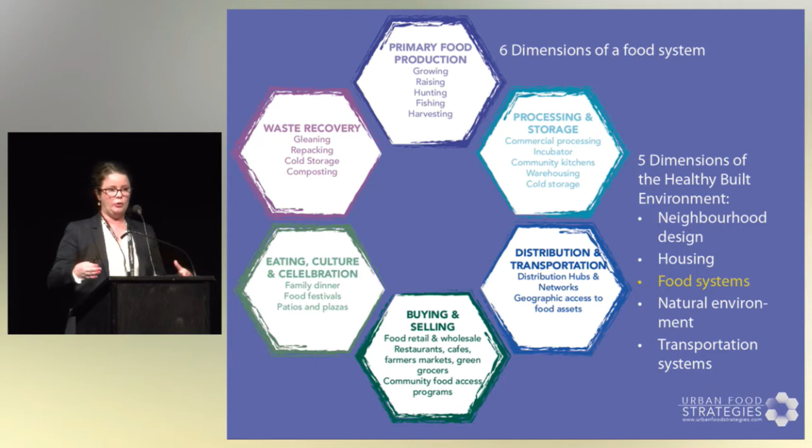You can also take that into the community level in terms of food access, and there are many vulnerable populations who don't have access to healthy diets. You also have the distribution and transportation side of things, buying and selling—there's a major range of how people do that and how you access food. And the act of eating and celebrating food together.

The waste that's generated from our food system—I'm going to go into that a little bit later, but it's remarkable. You may be shocked to learn that over 40% of pre-consumer produce is wasted, and then another 30% after that. So we're looking conservatively at a 50 to 60% burn on produce alone.

Think about the water that goes into that. Think about the fossil fuel that goes into that. That's an incredible waste. Not to mention that every single city—Toronto's definitely not an exception—has a huge cohort of food insecure people who are going hungry, who do not have access to fresh food, who are experiencing serious health issues, and at the end of the day, aside from the human suffering side of that, it is costing us a great deal of money.

I should mention too, I'm couching this in the healthy built environment. Food systems is really just one pillar of the healthy built environment. There are other dimensions of that, as I'm sure all of you are aware—neighborhood design, housing, natural environment, and transportation systems would be grouped in there.

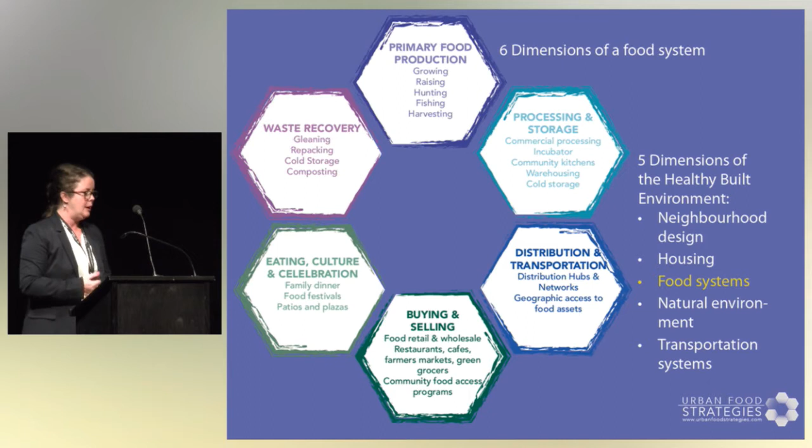I will spare you my new urbanist rant, but I do like the transect. I bring that into the food system planning world because it helps us identify context. You're not necessarily going to propose a green roof in an industrial area where there's nobody around, but you might do something totally different out there. So the idea is that you might have different treatments in a downtown core versus a suburb, and you can actually start codifying context-specific strategies through using a transect.

This drawing here is loosely based on the city of Nanaimo, a coastal community. They have a downtown close to the water, and then it grades out into rural lots that are farmed—some in the agricultural land reserve, some not. So we used this approach to do a charrette, or more of a workshop, I should say.

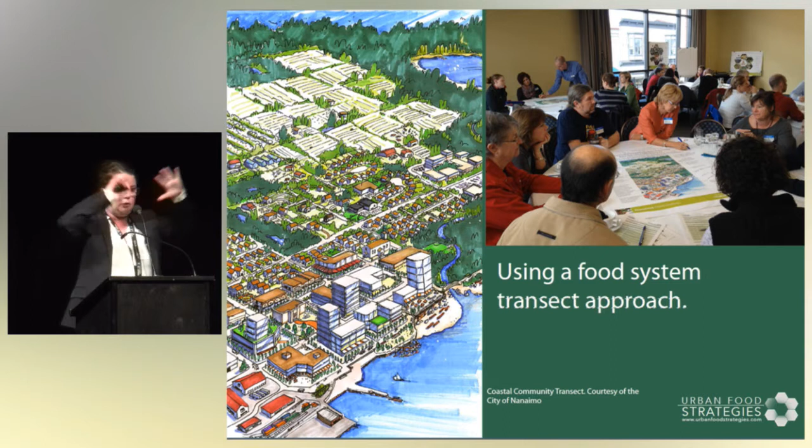We printed this on huge posters, and we had people at a community forum annotating what they think different parts of the food system should go where. That was a tool for the city to engage community and have a plan that makes sense, because what we're not doing is putting community gardens everywhere. That's not what food system planning is at all—it misses the point completely.

Not to diminish the importance, value, and benefit of community gardening, but we have gone so far beyond that. That's like innovation from 10 years ago. If you're not doing that now, then we've got to get on that.

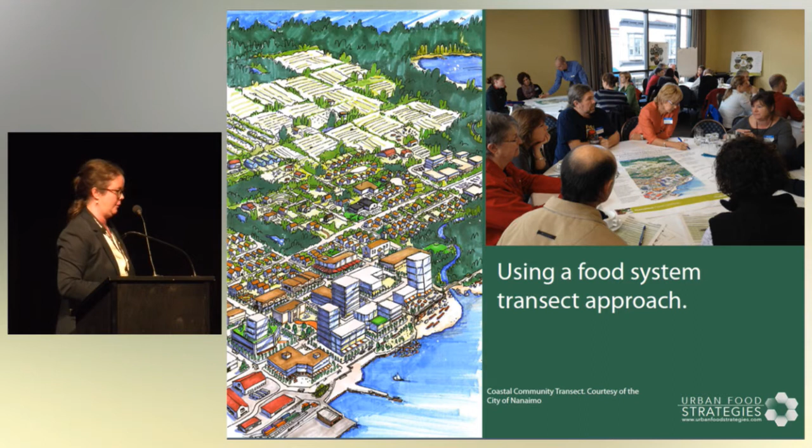So, opportunity in the built environment. I'm not a designer, so I'm not speaking from credentials in this area, but I do work with designers quite a bit. From what I understand, the built environment contains streets, buildings, and open spaces. So I want to put that out as the different pieces.

If you're doing a site plan and looking at your street and your buildings, how are you bringing food into a street? You might have extra wide sidewalks so cafes can spill out and you have an active street—there are so many great streets in Toronto that have that. You might have stormwater features, edible plantings, or food creation at grade while limiting office space at ground level, so you have interest and people are drawn to an area, making a critical mass of activity and awesomeness.

Buildings, of course—we're here today talking about buildings. In terms of integrating food systems into a standalone building, there's the intensive green roof concept, putting food on the roof. In Vancouver we've had a tough time with insurance companies on that because of our leaky condo problem, and they tried to bring this into the Olympic Village and it was not easy. But there has been some progression—there are green roofs up there now and the food is starting to come, but it's not as wonderful as the initial renderings were.

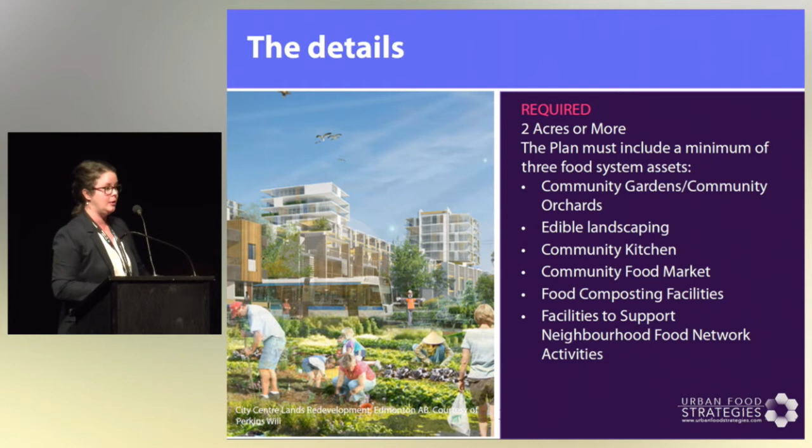So I've spoken with the city. I'm like, how is that going for you guys, how is that working? The response I'm getting is that developers are responding to the requirement well. The level of the proposals aren't at the level of detail where you can necessarily say that's really window dressing and not a substantive change to your plan. They have quite a range of things coming in, from very fluffy and non-substantive to very thoughtful and promising. So again, we have yet to wait and see. I'm not going to say this is a best practice quite yet, but it is unique in the country and I think a leadership example.

Okay, so agri-hoods. Again, I'm not going to go on my new urbanist rant, but Andres Duany at one point said agriculture's the new golf, and I was so mad. I'm like, no, it's more complicated, more nuanced than that. But the man has a point. Golf courses were like the amenity to have if you're retiring or whatever, you like golf, and that is what you want, that is amazing. Now the shift is they're putting in farms instead of golf courses, converting golf courses back into farms, which is interesting. I feel like this is a really seductive idea.

This has great potential to build amazing neighborhoods. What I'm showing you here is an example of something I did for one of my clients in BC, a golf course conversion back into a farm, which is unheard of. It's the only project I agreed to work on that was in the ALR.

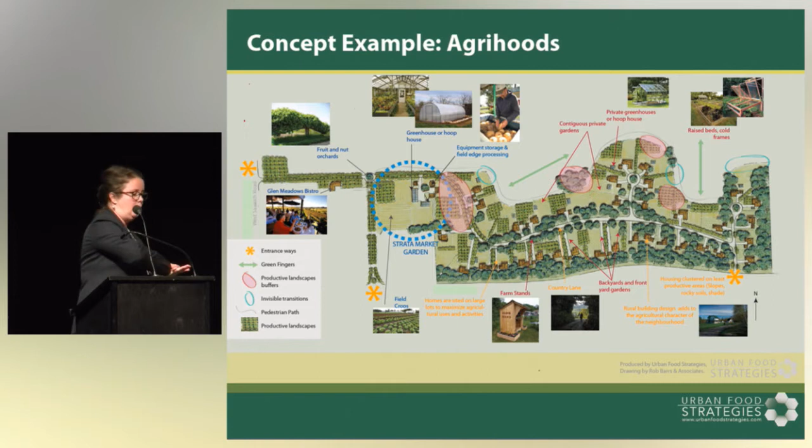The idea is that you take that honeycomb diagram and basically layer it into the site. Initially, at a site planning stage, you use annotation and try to get creative, making big lists of ideas to see if this works. The next stage of this project will be to form relationships with the farmers who would actually farm the land. Part of what I like about this model is that the strata fees for living here will produce between $75,000 and $100,000 a year to pay for the management and ongoing operation of the strata farm.

That will help bring people on site to the cafe, restaurant, to do farm tours and what have you. So what you don't see on this is the other 200 acres of the site that would be given back to the municipality as a farm asset. This can be used as rationale for greenfield development.

If you find yourself in this world and are curious about this, I'd be happy to talk about some of the pitfalls this can fall into, and how it can be misused as a way to build on farmland, which is completely counterpoint to its original intent. But it is a fun concept, and we are seeing some examples happen. To be honest, there's not a lot out there that I feel is a really good example yet.

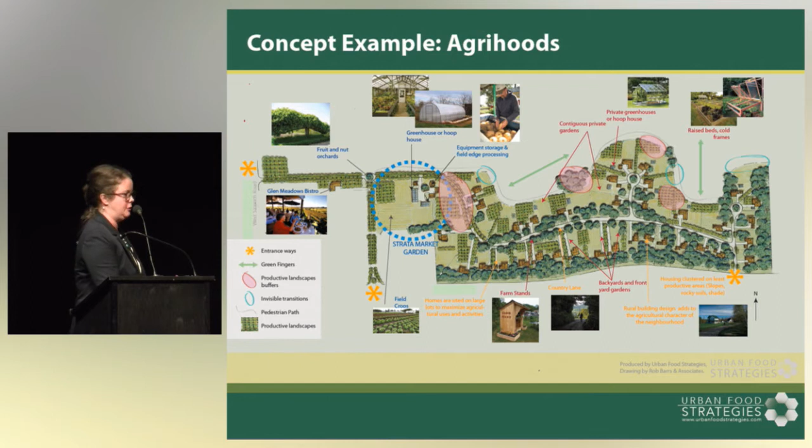We still have to have one of these neighborhoods built. We've had a project in the Lower Mainland called the Southlands, and it's been highly controversial for the last 30 years. They finally just got their approvals to go ahead and start detailed design. So that's a case study to keep your eye on. It may be really good, or it may be medium good. I think it's probably going to be medium good because the municipality drove down the density, so they can't do very much interesting things anymore.

Urban food magnets. This is the idea that you have so many of these in Toronto. This can also apply to smaller communities. All of what I'm talking about has rural and small town applications, also northern community applications. But it's the idea of creating a place that has multiple functions, that draws people in, and is about more than just a single bottom line, a business making profit.

It's about tapping into the local producers. There's Vancity, one of our financial institutions, that provides a lot of funding to food projects, and they have a demonstration kitchen where, if you don't know how to cook with garlic scapes, they'll show you.

So creating places like this is in the Hudson Building in Victoria, downtown. What's really interesting here is it was a partnership between nonprofit and developers, and they got together and formed terms of reference and governance, and were able to get a really affordable lease rate for local businesses to locate here.

So this is just the last slide I wanted to leave you with, some thoughts on success factors for integrating food systems into the built environment. Consider opportunities for urban and rural communities. I feel like good design is always in big cities, and I think there's such an opportunity to bring good design and good ideas to our smaller communities and our northern communities.

Create synergy between food assets and other uses and activities. Food is not a standalone piece. Try to figure out how it can support other things and how it can have multiple functions in your plan or design.

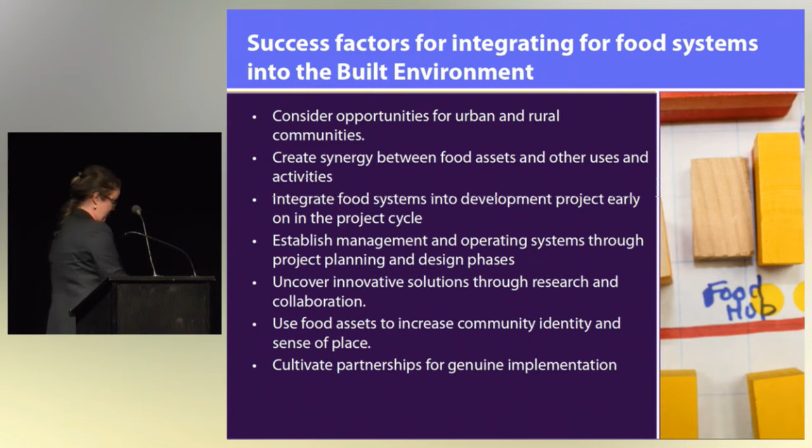Thank you, Janine. So the organization asked me to make a presentation, and I'm not going to do it, because if you're like me, I'm up to here with information. So what I'm going to do is try and keep your focus off lunch for a moment or two, because there's some really interesting ideas I'd like to hear you folks talk about. I'm going to try and spark some debate by throwing three key ideas out there as a way of tying together water, food, biodiversity, and urban systems.

And I said, Stephen, water is energy. And he said, yep, hadn't thought of it that way, but don't tell the states that, because it'll put a whole new spin on the Great Lakes.

From there, I think the other thing that comes out of it is we don't really have an energy crisis. We have a fuel source crisis. We have an energy conversion crisis. We have an exchange, distribution, and storage crisis. And we have it at both the level of watts of energy, and also at the quantum level in terms of Shannon information, because for me the quantum level of energy is what starts to tie this together - the water, the food. Food is storage of energy, and water connects to biodiversity.